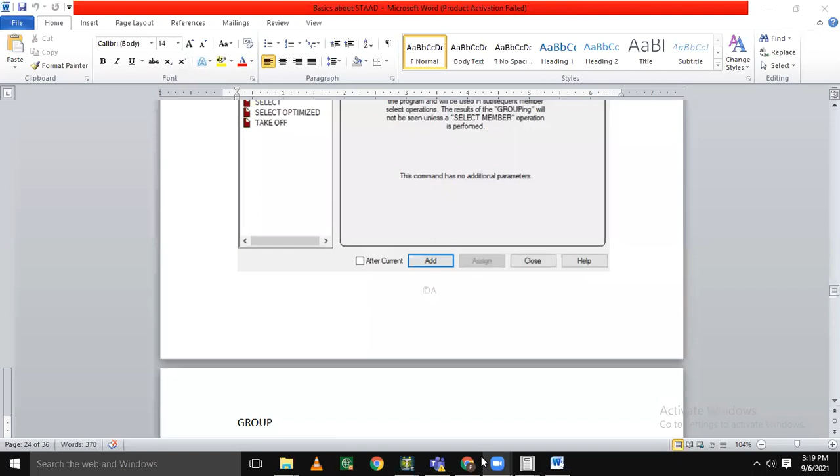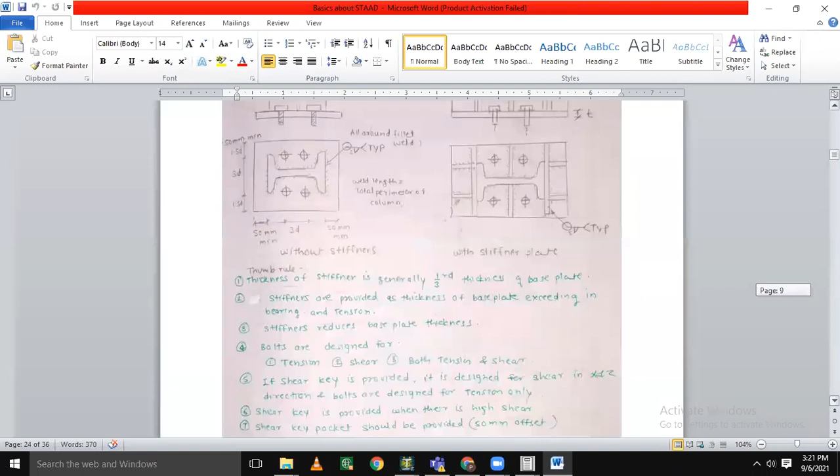Okay, just wait. Okay, sorry, I was facing some internet issue. Okay, now I will share my screen. Can you see my screen? Okay. Yes, ma'am.

We have seen RCC building, how to analyze RCC building by using STAAD, how to analyze and design a rectangular water tank as well as circular water tank by using STAAD. Now we are going to see the steel structure, how to design and analyze steel structure by using STAAD.

So in RCC structure, in any STAAD model, basic five steps are there. First is model, then second is framing, then define parameters, then analyze and then design.

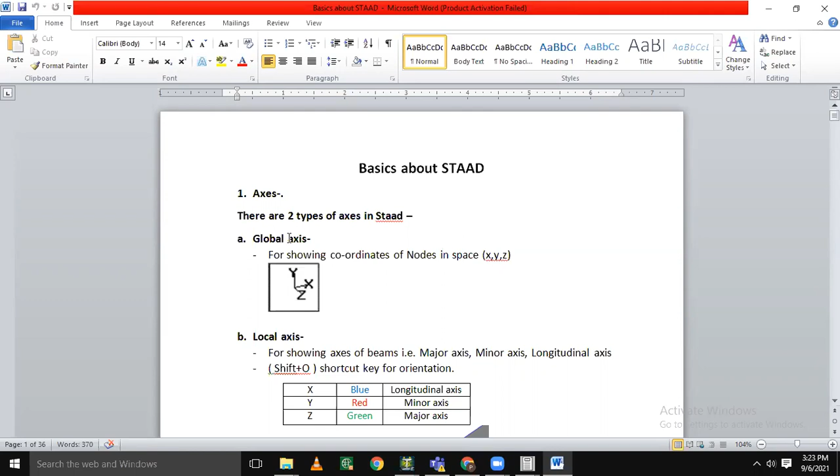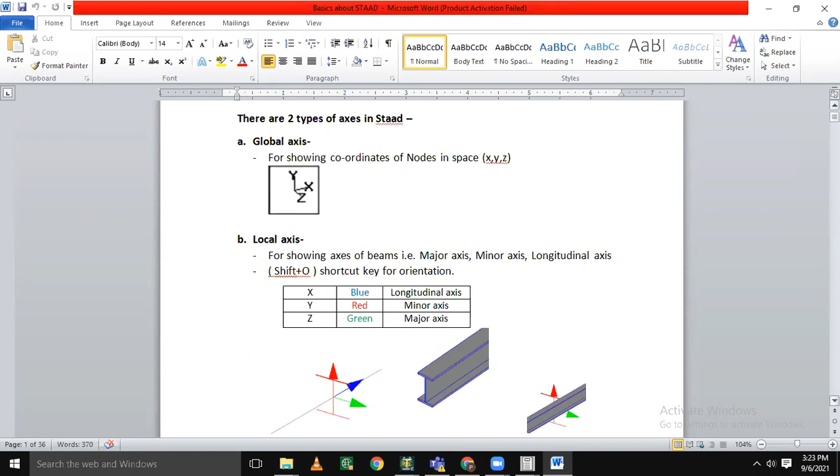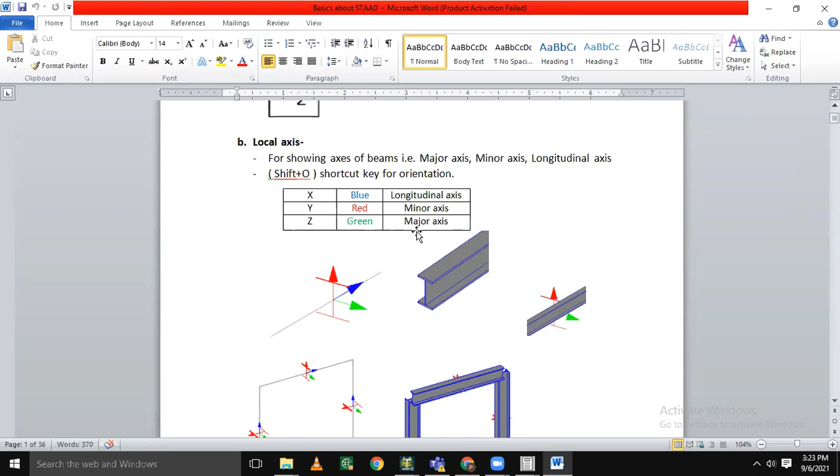This procedure is fixed. Okay, the global axis is for the whole structure and local axis is for that particular element, like beam, column, or any member. Now longitudinal axis is shown by blue arrow, minor axis by red arrow, and major axis by green arrow. We have seen this.

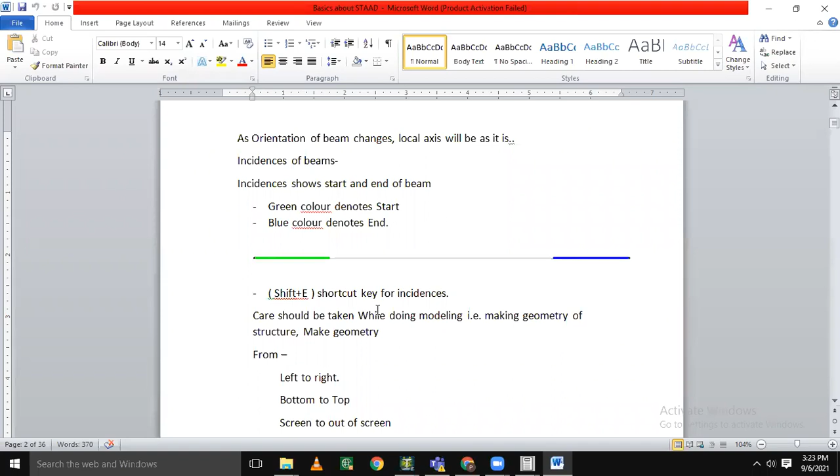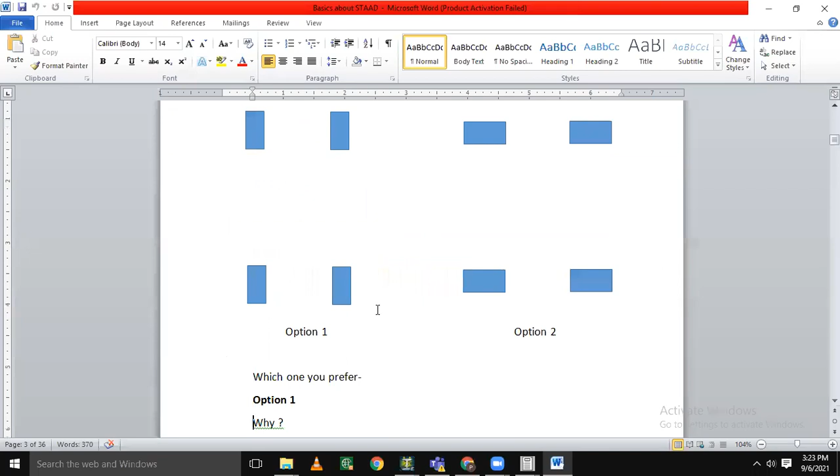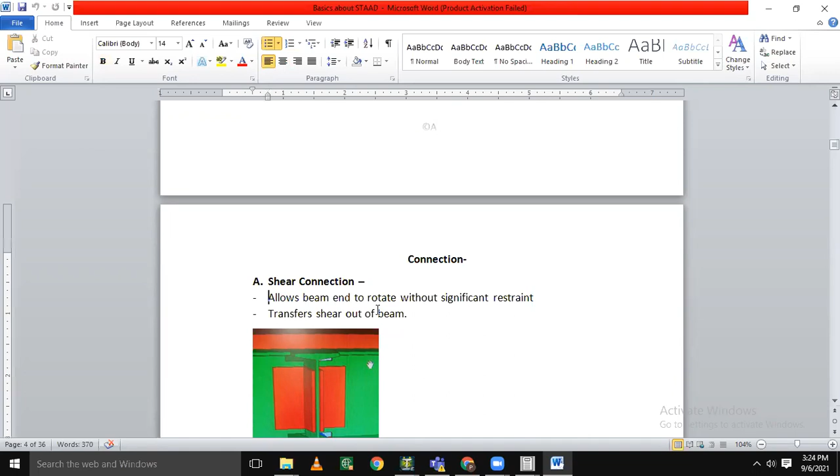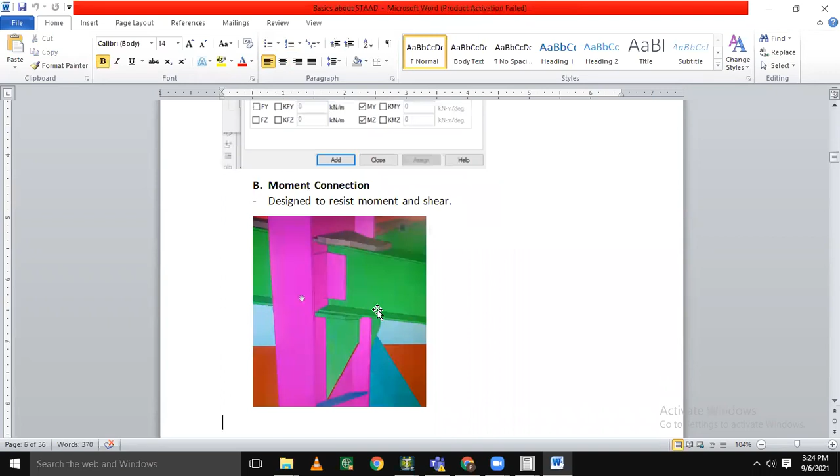How we can identify the start and end of the beam? By the colors. Green color shows the start and blue color denotes the end of the beam. Now we'll see the connections we need to use in steel structure. Mainly there are two kinds of connections, shear connection and moment connection. Shear connection transfers the shear, and moment connection is designed to resist the moment and shear.

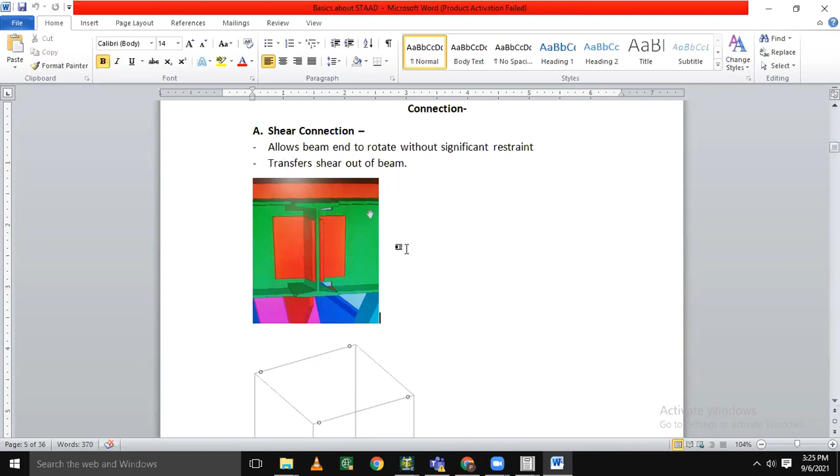Okay, it transfers shear out of the beam.

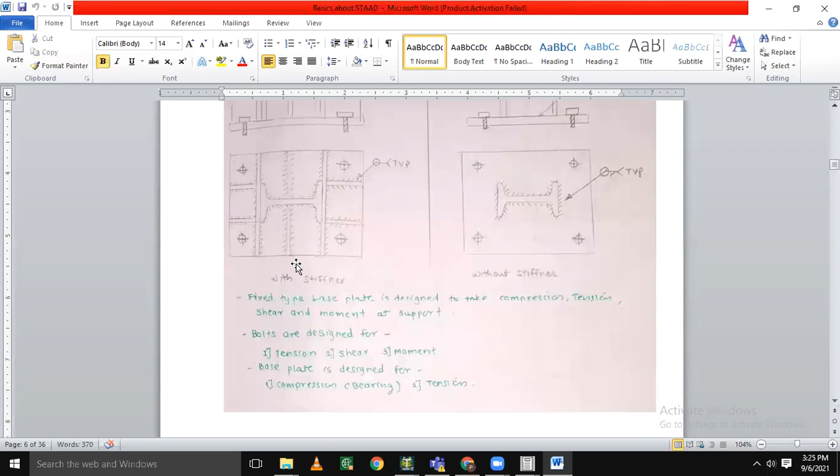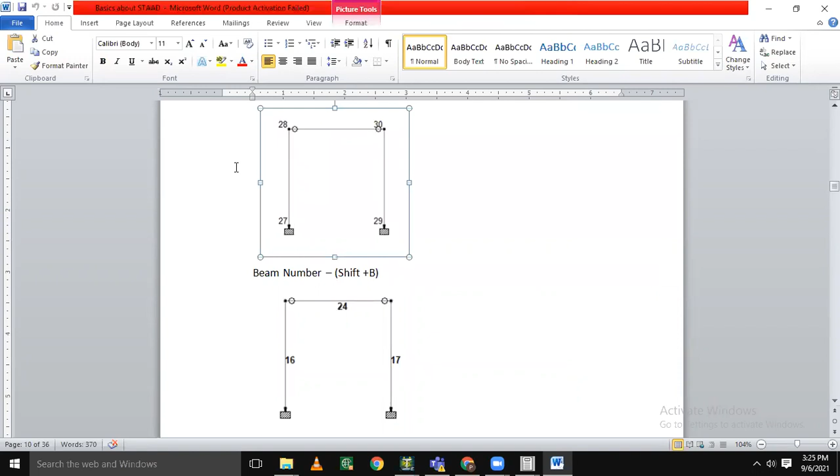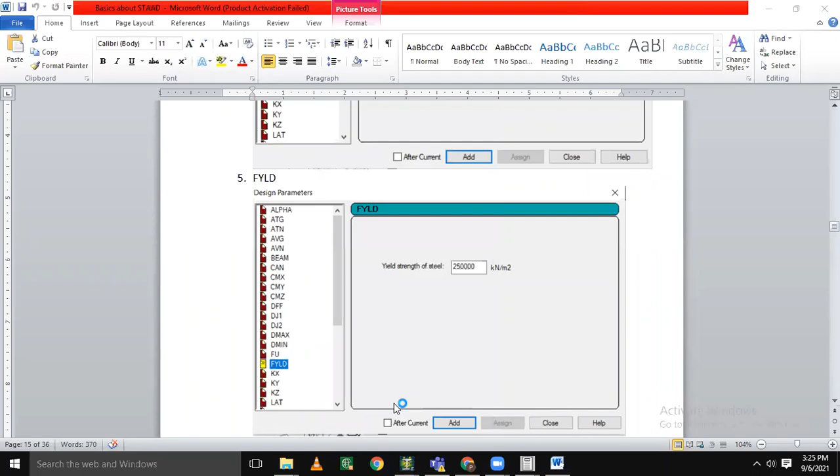Now we'll start the drawing. Take the new project. Click on new project, click on space. Now give a name to your file, that is steel structure. Give a location to your file. Select length in meter and force unit in kilonewton. Click on next, click on add beam and finish it.

Now you can see. Now keep your structure in front view. Now I'm assuming the length of my steel structure is 8 meter and width is 6 meter. Okay, my length is 8 meter and width is 6 meter.

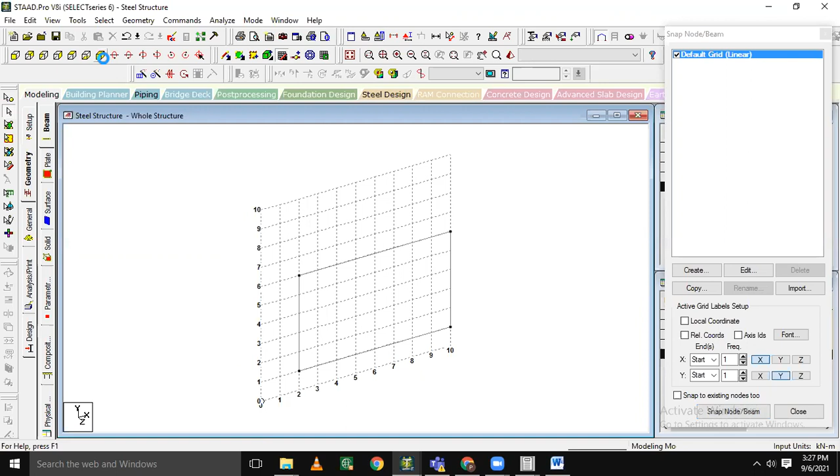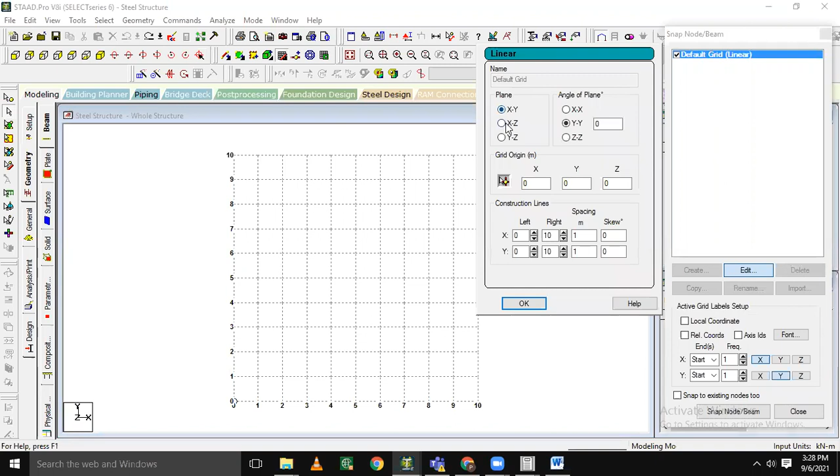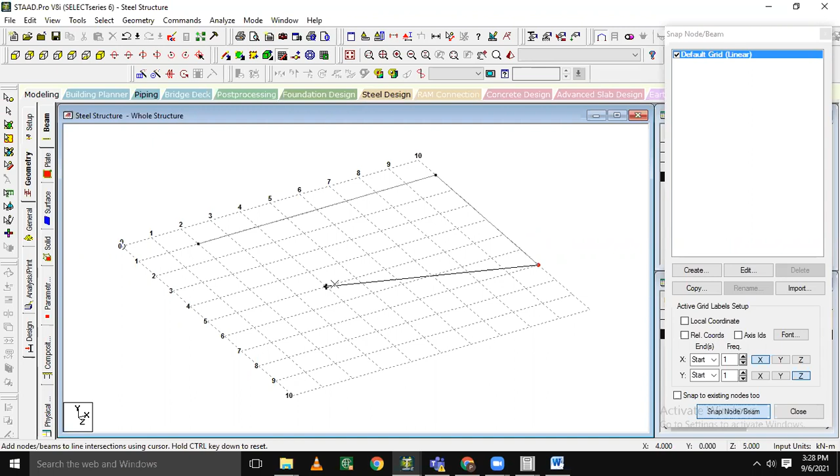I just forgot to keep my structure in XZ plane. Just undo it, and go to edit, keep the structure in XZ plane. Click on OK and start it. Click on add beam. Click on snap node beam. Length of structure is 8 and width of structure is 6 meter.

Click on top view and just divide the length in 3 parts. For that, go to insert node command. Click on add n points and divide it in 3 parts. For that, give n is equal to 2.

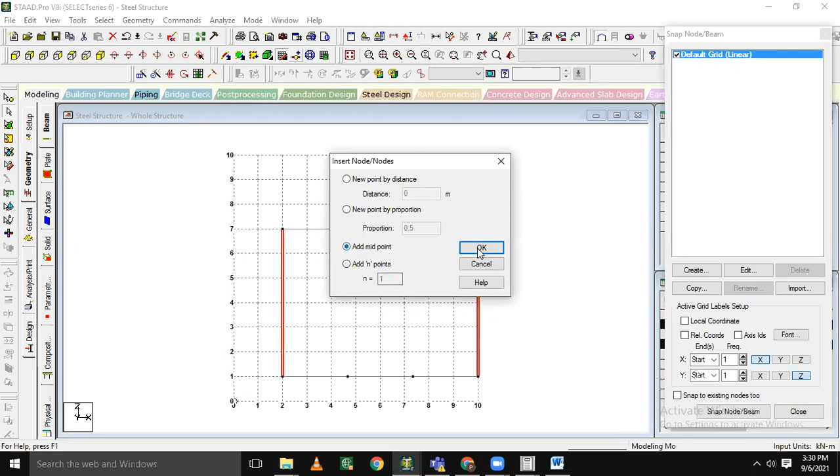Again, click the other 2 beams and divide them in 2 segments. For that, again click on insert node, add n points, click on midpoint and okay. Now just join this by using add beam command.

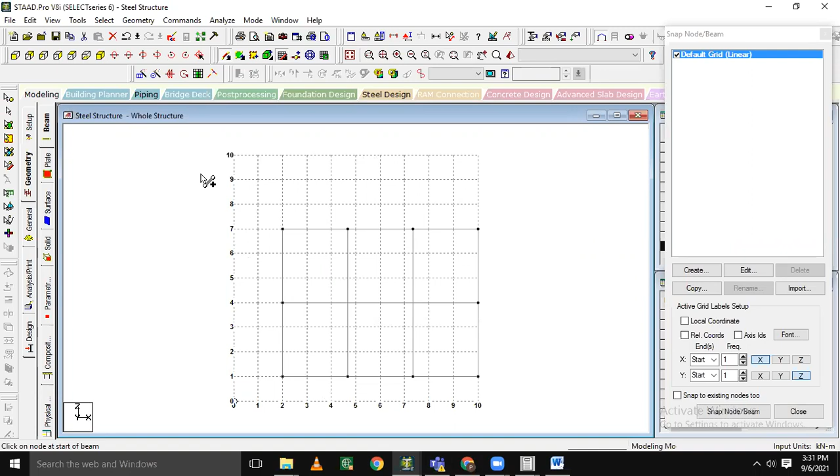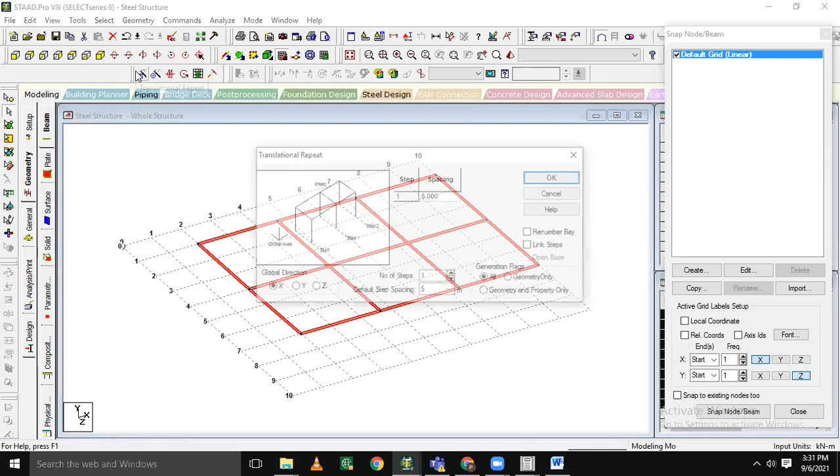Okay. Now just keep your structure in isometric view. Select all by using beam cursor. Select all and use translational repeat command along global Y direction, and number of steps are, suppose, 3, and spacing is also 3.

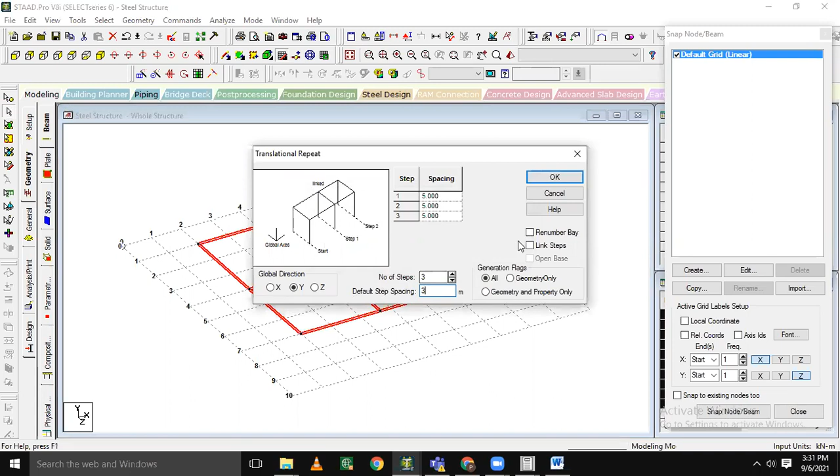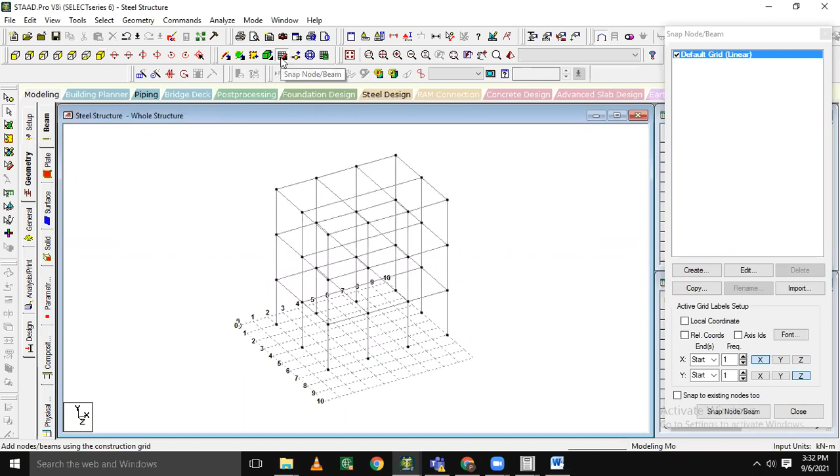Okay, spacing is also 3. Now click on link steps and okay. Okay, just go to and delete the bottom beams. Okay, now just remove the mesh. Okay, this is the modeling part.

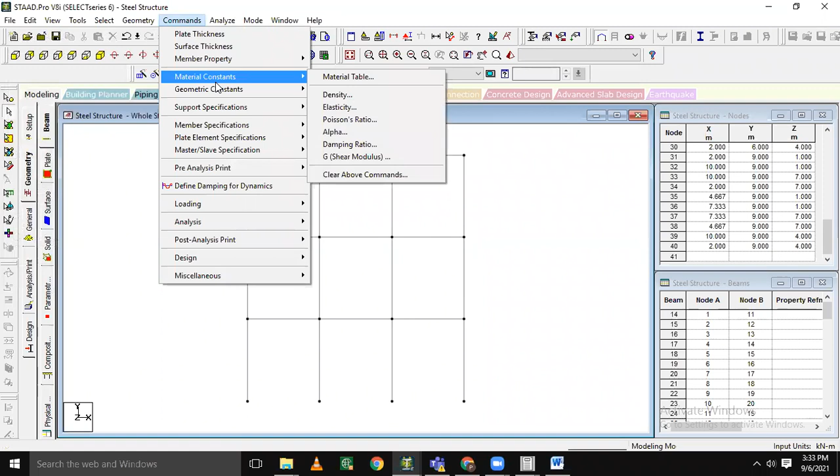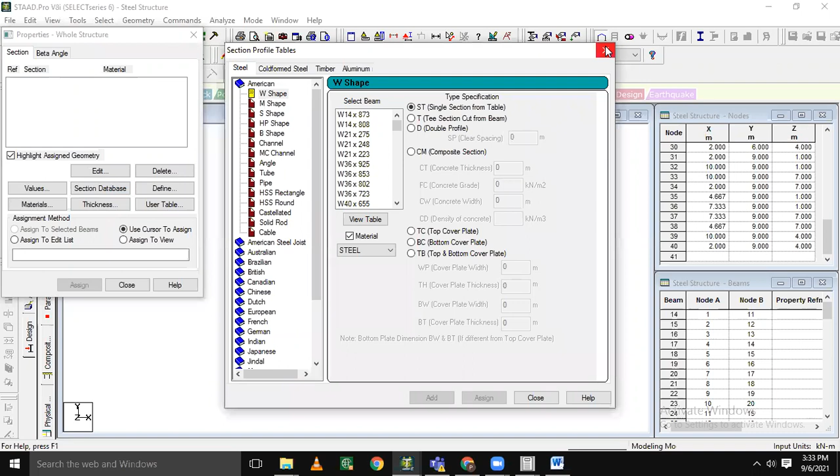Now just give the property to beams and columns. For that, go to command, go to member property, go to prismatic, go to rectangle, sorry, go to section database. Earlier we used to go to define. Now we need to go to section database. Click on section database.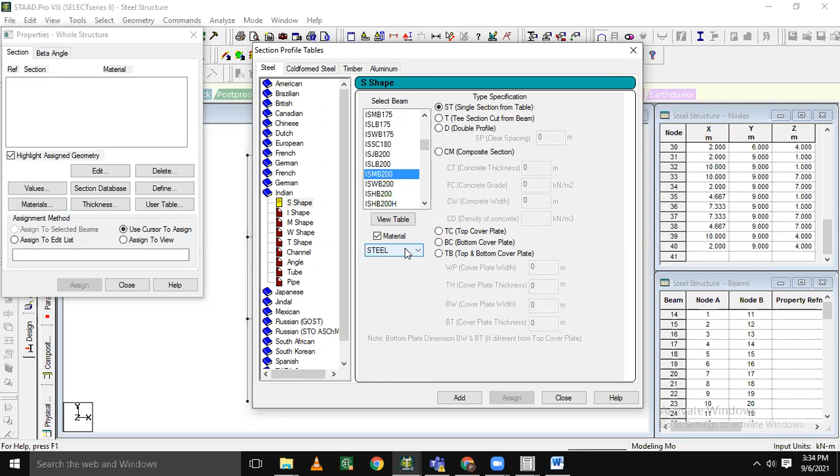Now choose the country, select the country for which you need to design the structure. I'll choose Indian. For beams I will choose ISMB, Indian Standard Medium Beam, ISMB 200. Click on ISMB 200, make sure the material is steel and click on add button.

Okay, now click on channel section for the column. I will choose ISMC 150 front to front.

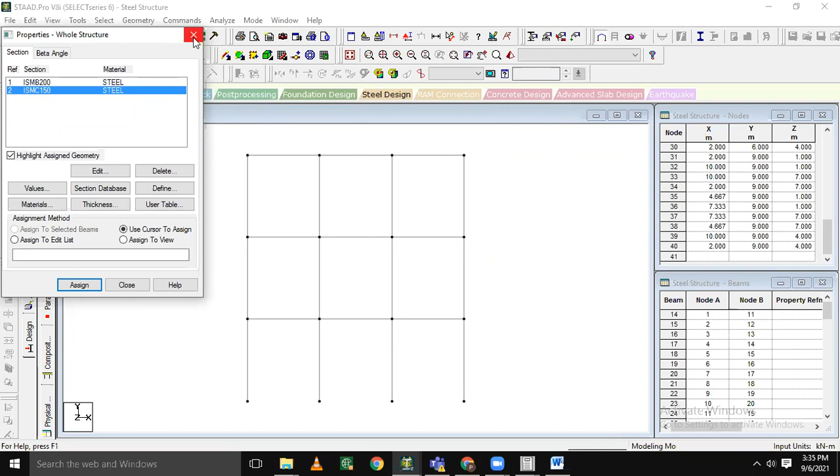ISMB 200 for the beams and ISMC 150 front to front for the columns. Okay, now just create a group. For that, press Ctrl G to create a group. Press Ctrl G. Now give a name to your group.

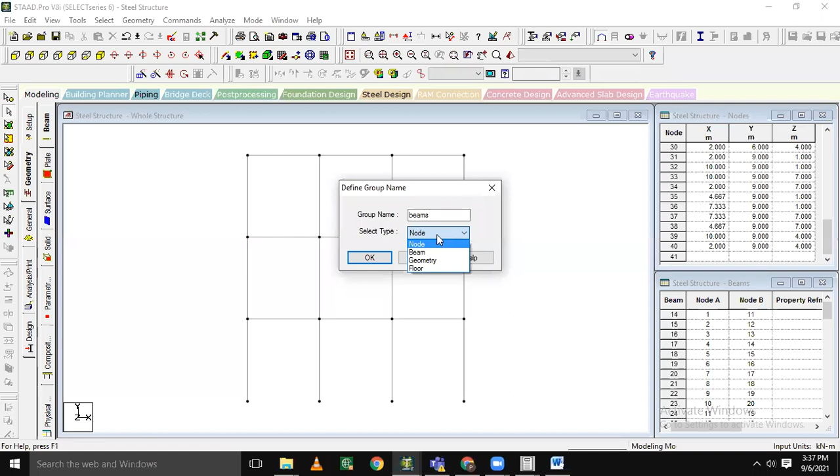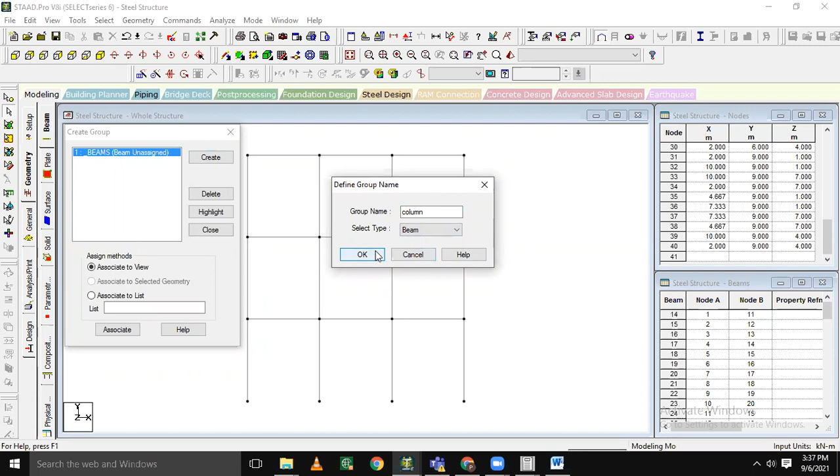Beams, okay, select type as beam, click on okay. Now create one more group, give a name to your group, that is column, select type as beam and click on okay. If we haven't assigned members to the group, it shows beam unassigned, column unassigned.

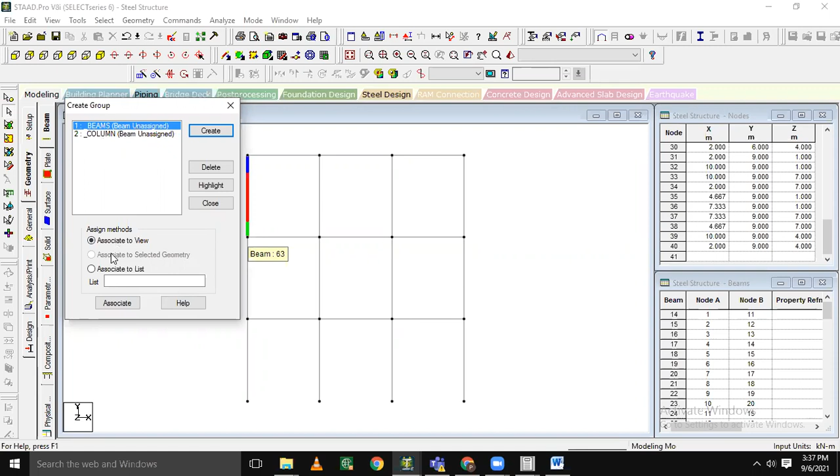Now just keep your structure in isometric view and select the beams parallel to X and beams parallel to Z axis, and associate to selected geometry. Now similarly for the column, go to select beams parallel to Y axis and associate.

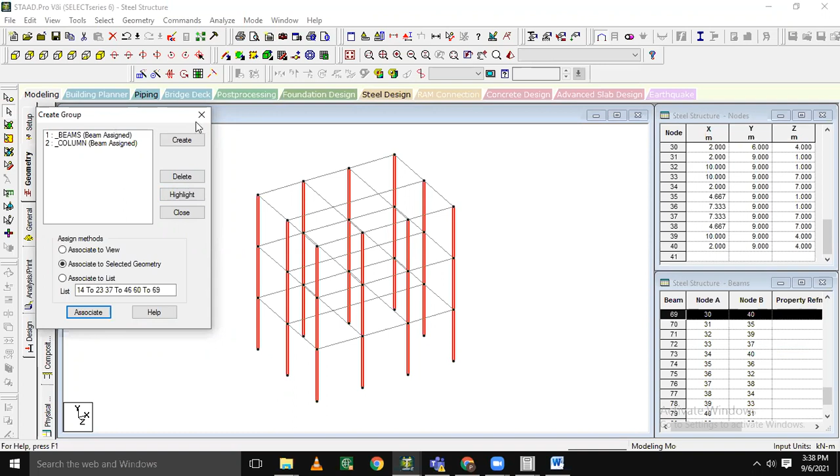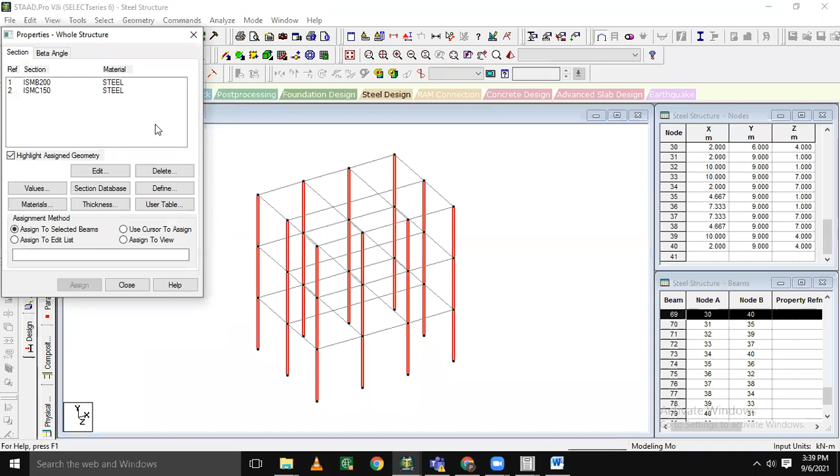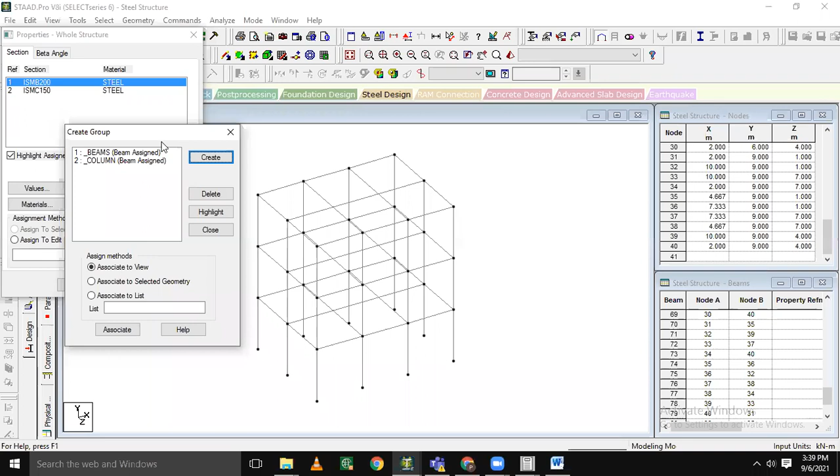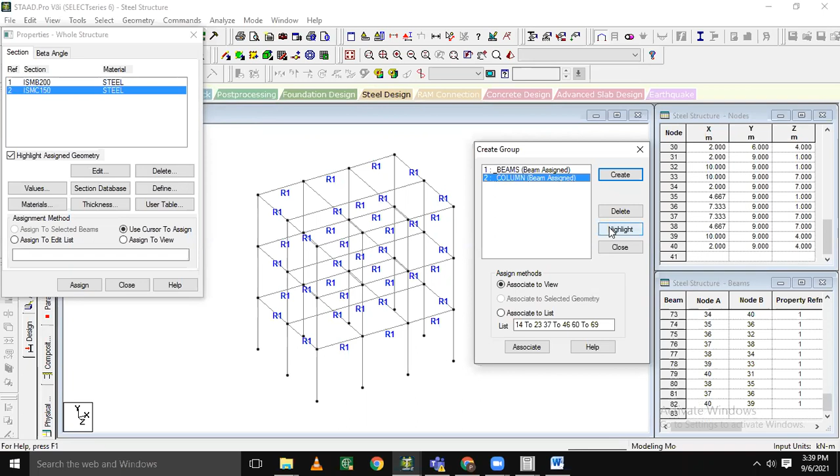Control G, just make sure it gets assigned. Click on highlight, confirm it's assigned. Now again go to member property. ISMB is for beam. Press Ctrl G, click on beams, click on highlight, and click on assign to selected beam and assign it. Now click on ISMC, click on second group column, highlight it and assign.

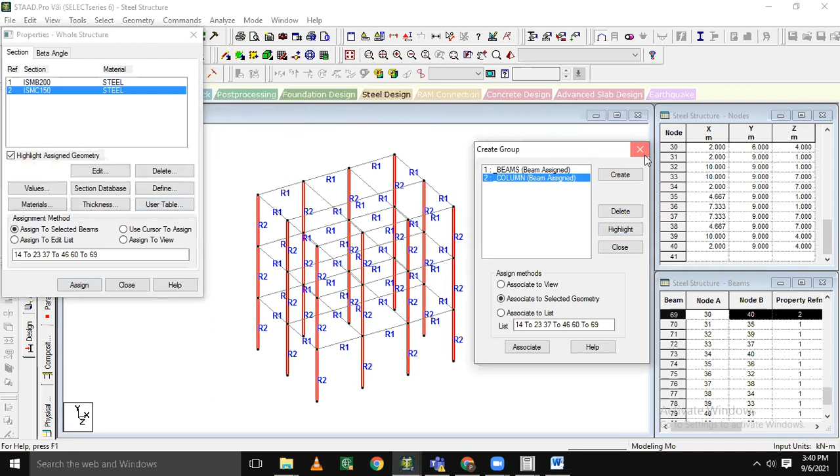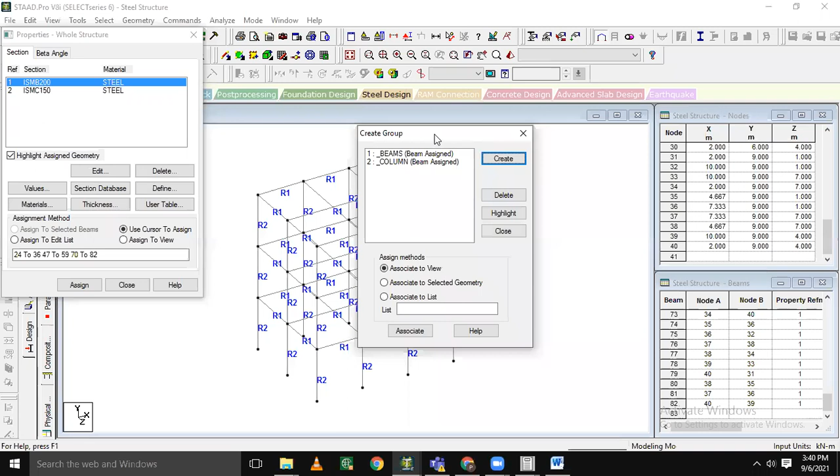We have opened both these pages. By using group page we highlight the portion, and by using property page we assign the property.

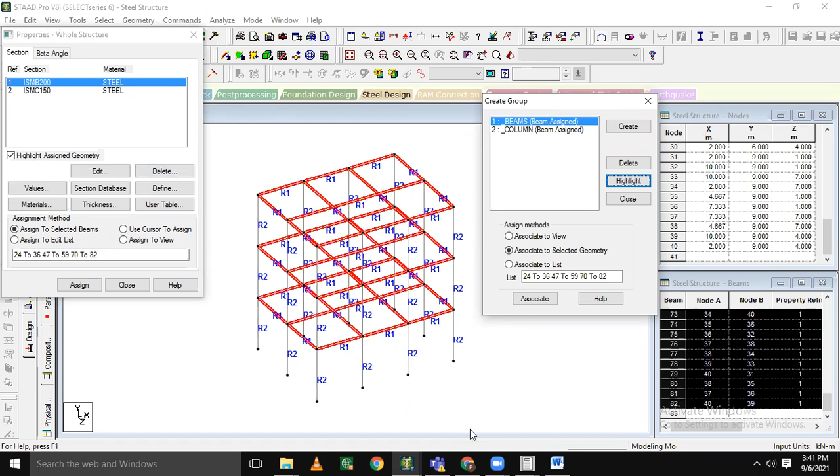Okay, now by using node cursor, select all the bottom nodes.

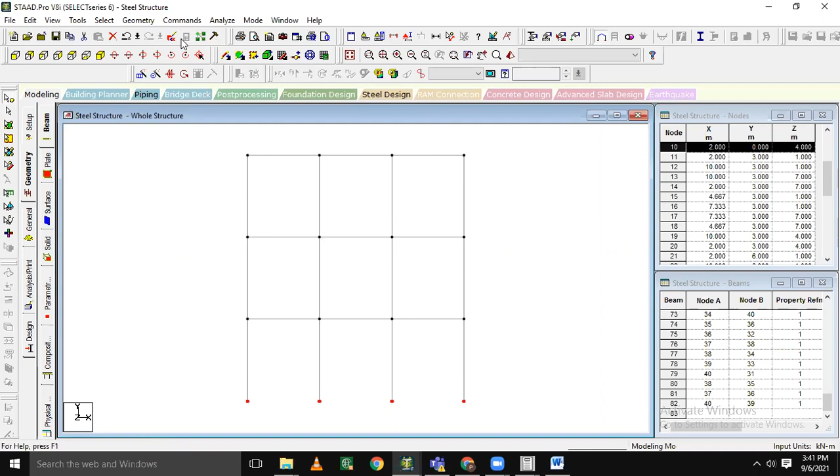Okay, now create a fixed support. Go to command, go to support specification and click on fixed.

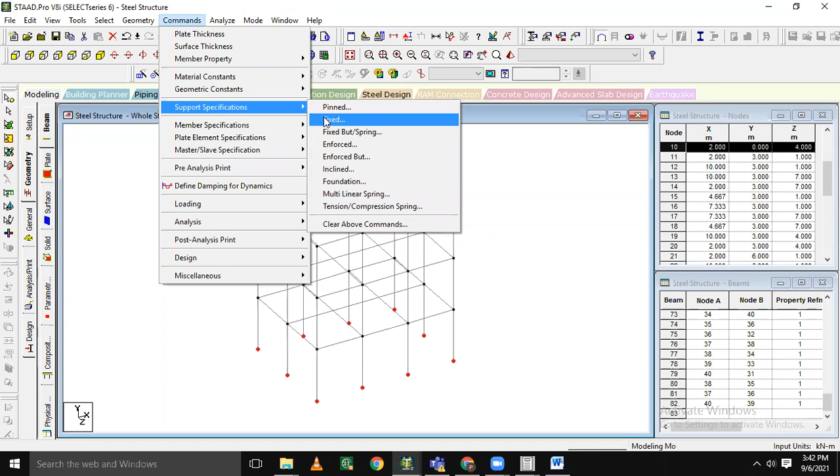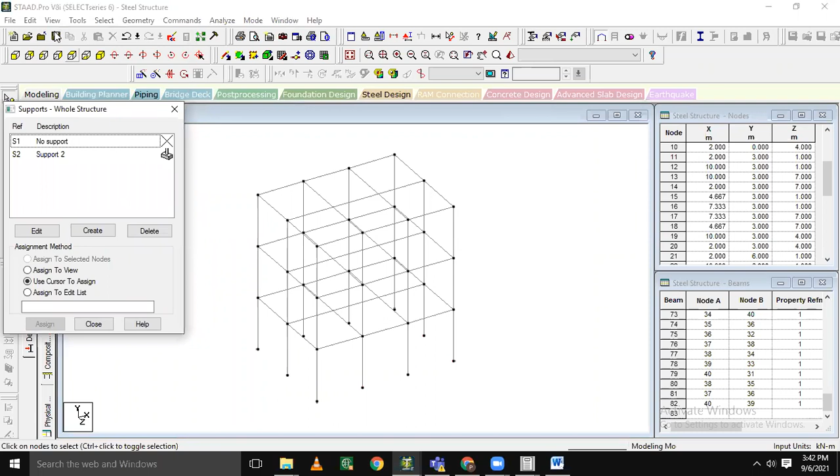Now add this fixed support. Select the fixed support. Select the nodes where we want to assign this support and assign it.

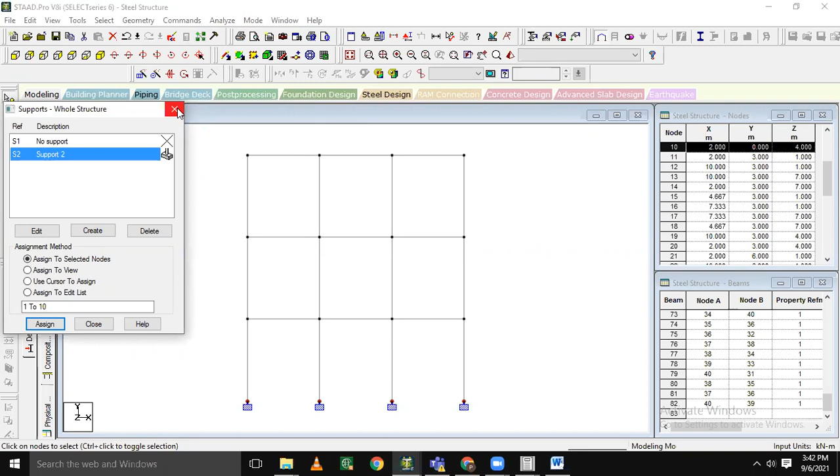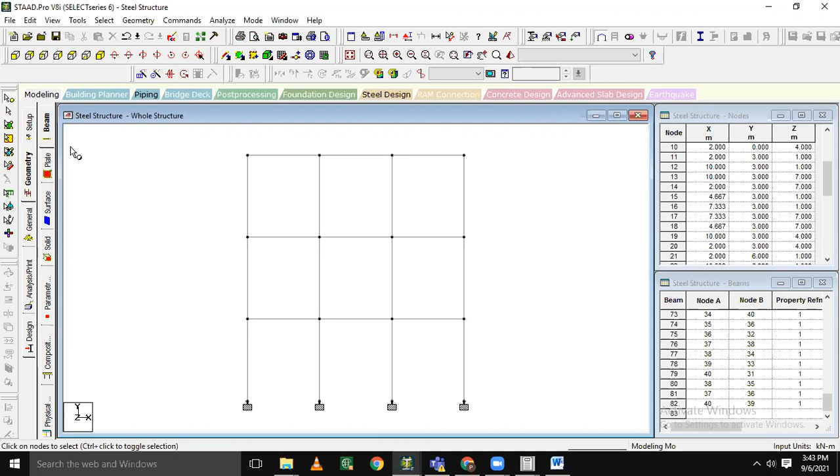Now the next part is the loading part. For that, go to the load page, or else go to command and loading and primary loading.

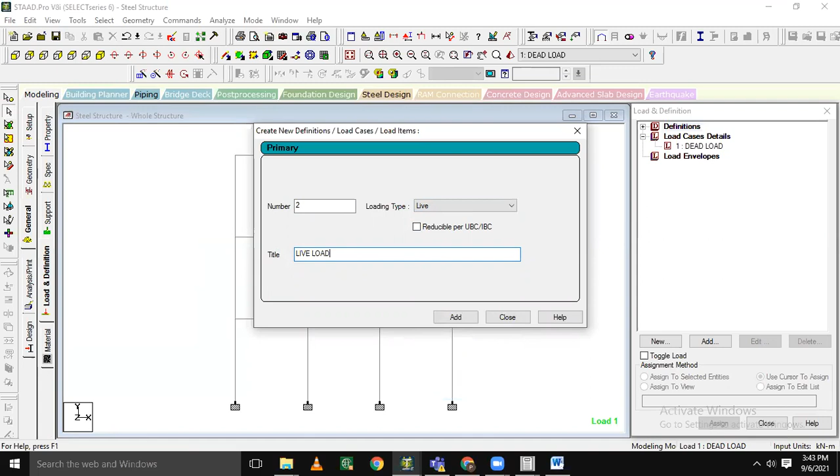The first is dead load. Give a title to your load: dead load. Click on add. Then the second loading type is live load. Give a name to your load as live load and add it.

Now click on dead load, click on add. Dead load is nothing but self weight. Just click on self weight. Give the direction: it's in downward Y direction with the factor 1.

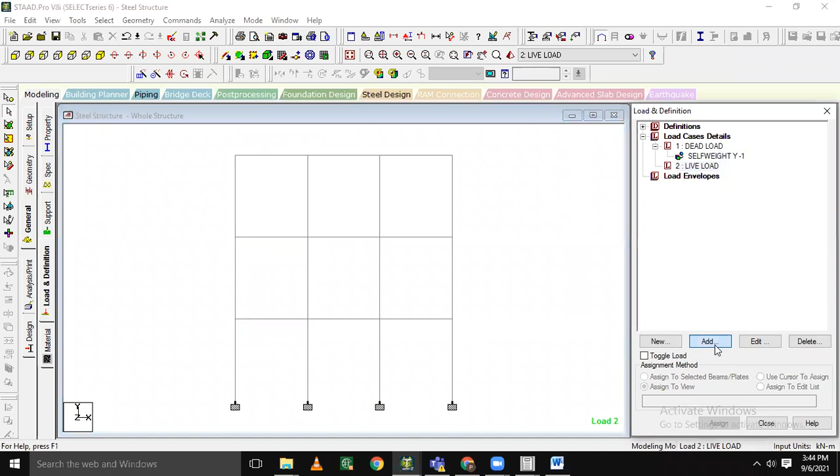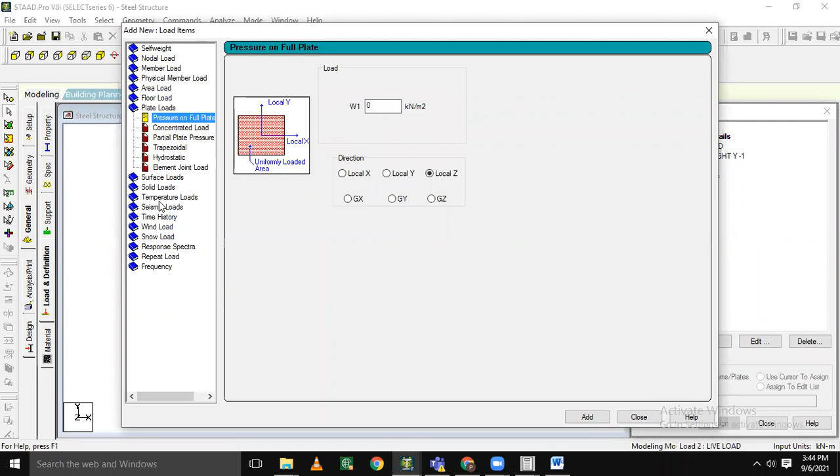Okay, and just click on add and close it. Now assign it. Just go to assign to view and assign it. Now for live load, go to add and go to floor load.

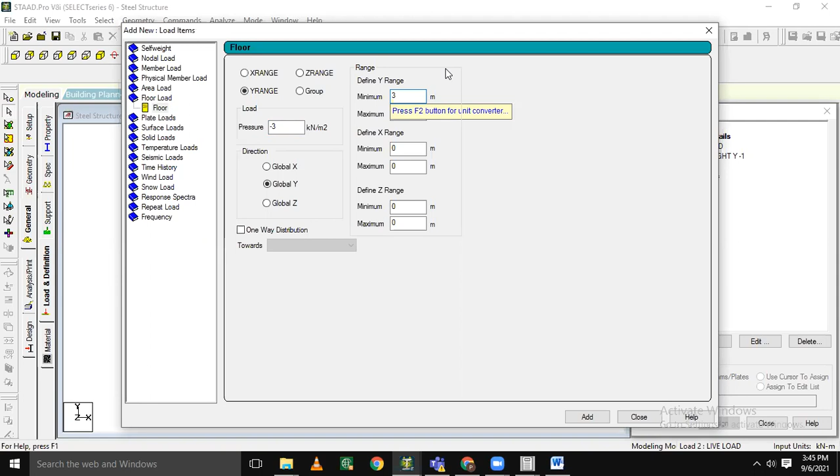Suppose a live load is -3 kilonewton. Give the range to it: minimum is 3 and maximum is 9. Click on add and close it.

Okay, here you can see a live load.

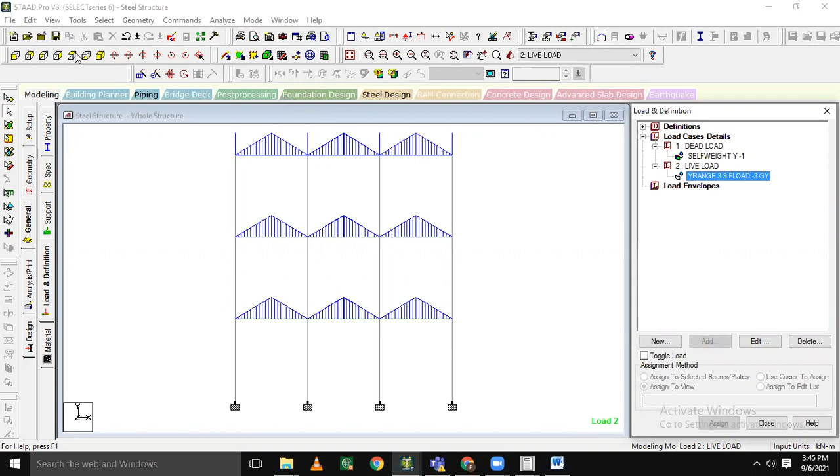Okay, you can see this structure in isometric view as well as rendered view.

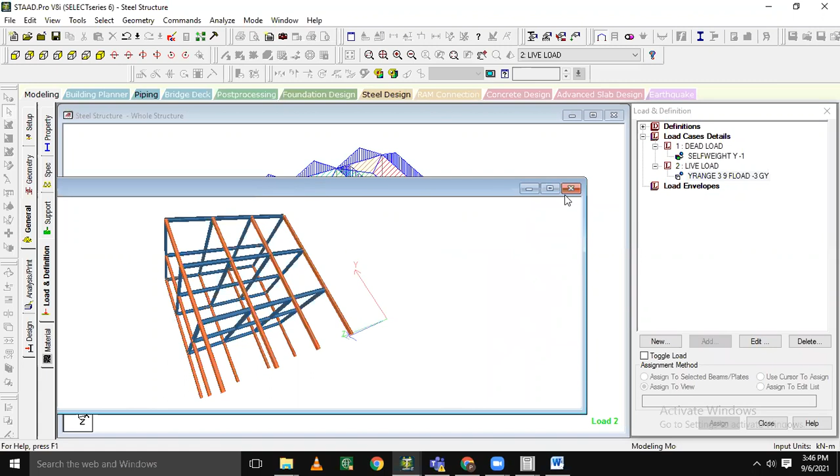Just close it. Okay, now we need to give a load combination. Click on load case detail and just click on add, and click on auto load combinations.

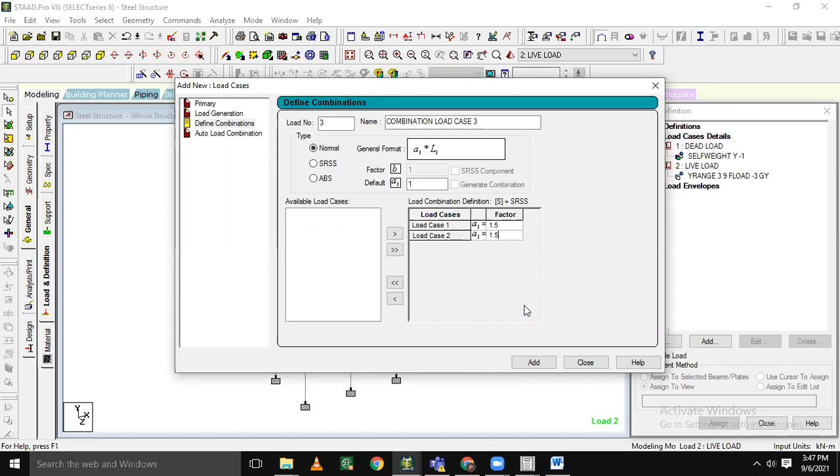We have modeled the structure, we assigned the properties to the structure, we have assigned support to the structure, we have assigned load for the structure. Now just analyze the structure.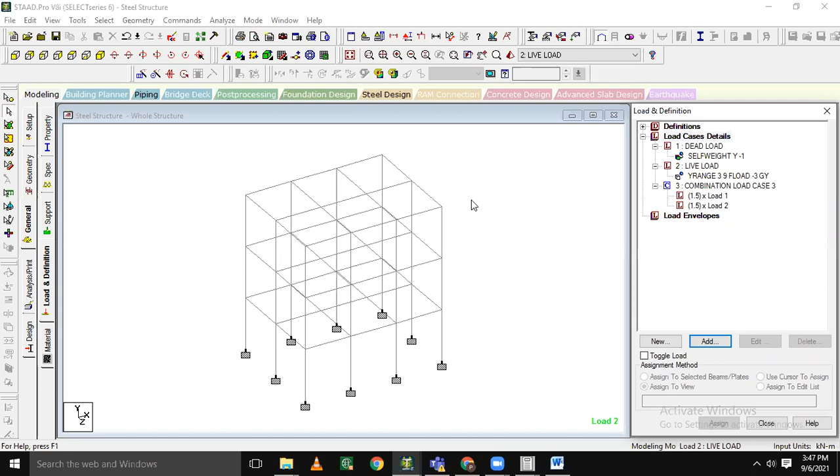Now analyze the structure, click on add and close it. Okay, now go to run analysis, save the structure.

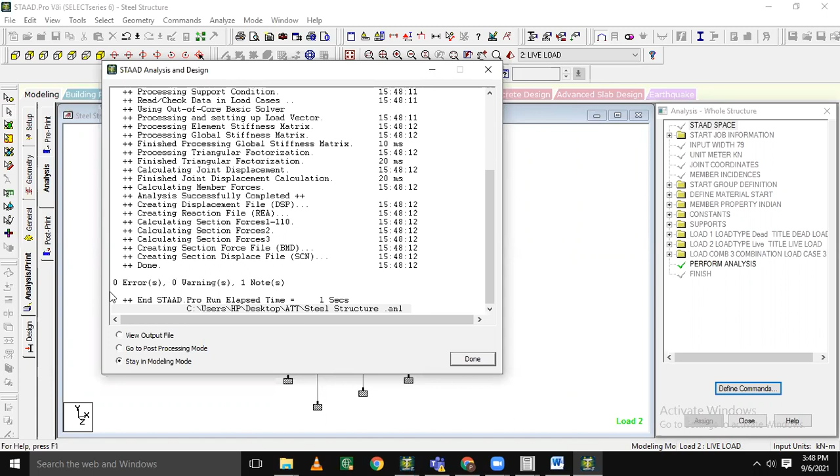Now just check for the zero error and go to post processing mode. Just click on apply and okay for the post processing mode.

Okay, just go to modeling again and now design this structure. Go to modeling and design the structure.

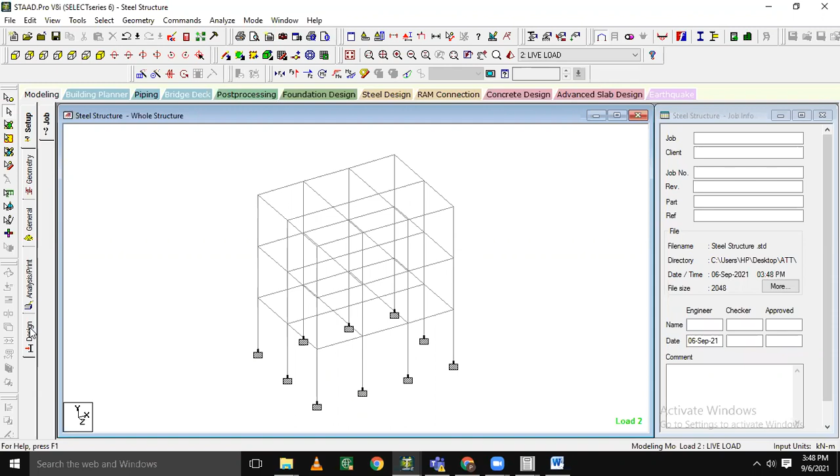Now we need to select steel structure.

Which IS code do we use for the steel structure? It's IS 800, right? Now click on IS 800 2007 LSD. Limit state method wala IS code we need to choose.

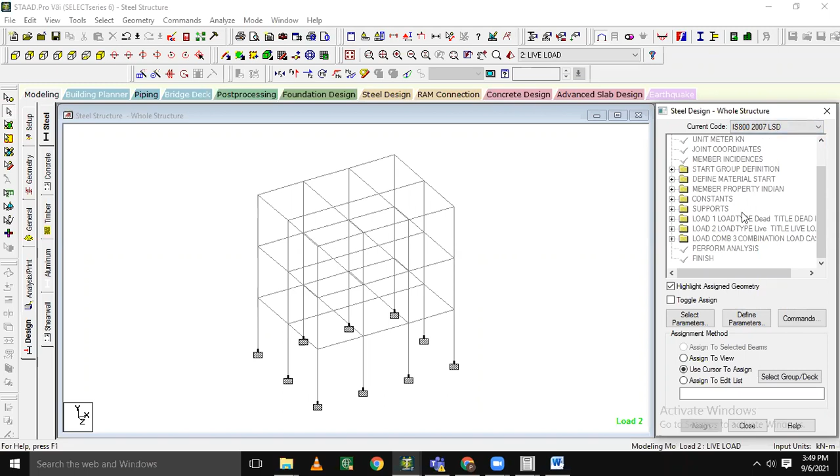Now go to select parameter. Now we need to choose slenderness limit and Main, TMain and Track parameters. These 3 parameters we need to select.

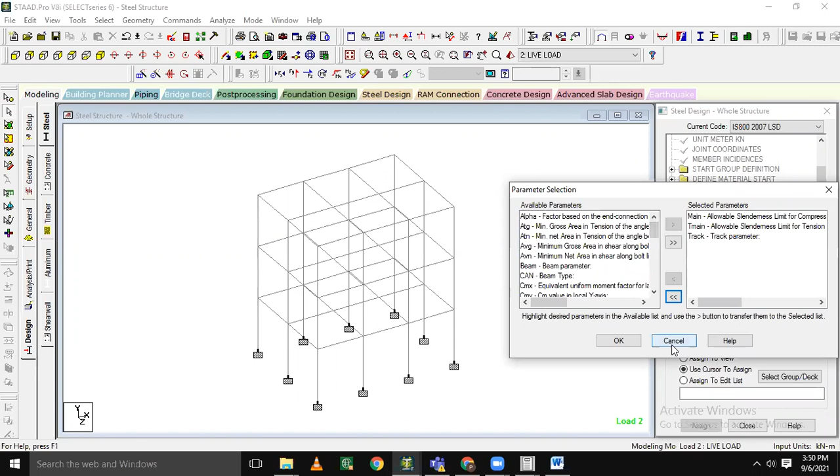Now click on OK, now define the parameters. Now slenderness ratio for the column: suppose slenderness ratio for the column is 180. Slenderness ratio for the beam is 250.

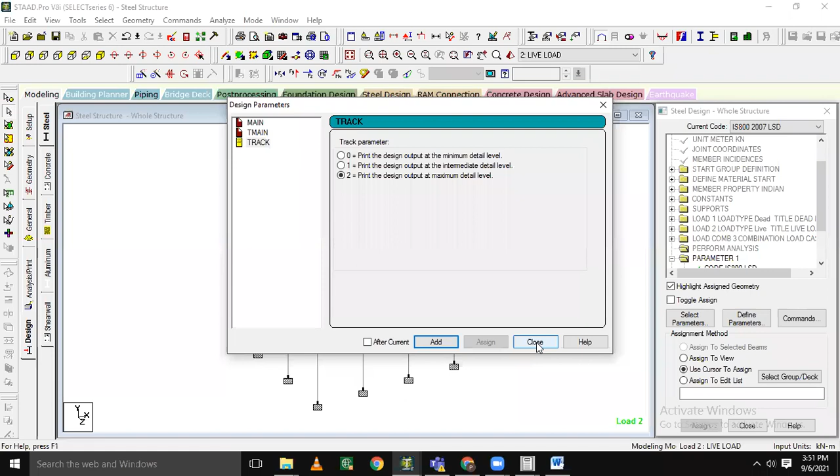Okay, and add it. Click on track 2 and add it.